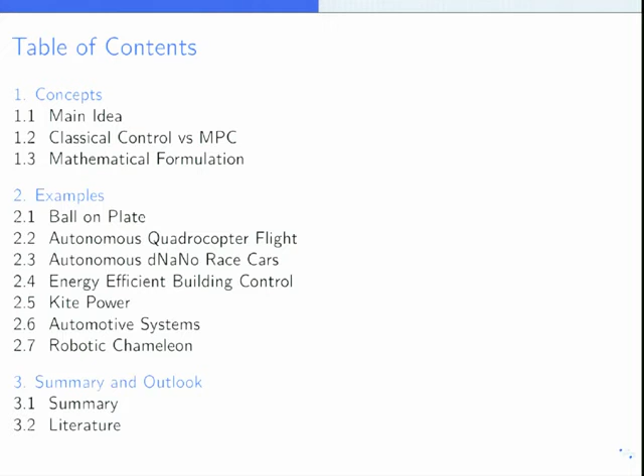So clearly, what are some of the objectives and constraints? Fastest lap time, clearly you don't want to crash, so you want to avoid the other cars. You don't want to fly off the road. Formula One race cars, contrary to rally cars, you don't want to slip, you want to stick to the road, don't want to slip with the back or anything like that. Your acceleration is big, but it's still limited, also because of traction. So you have a number of constraints.

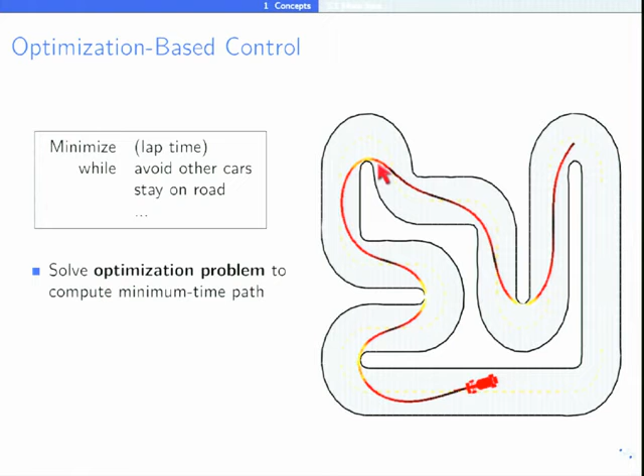Now the problem is, in the real race course, suddenly things change. There may be a car that moves in front of you, and so you cannot just follow this race course as it's indicated here, because if you follow your trajectory, you're going to hit that other car.

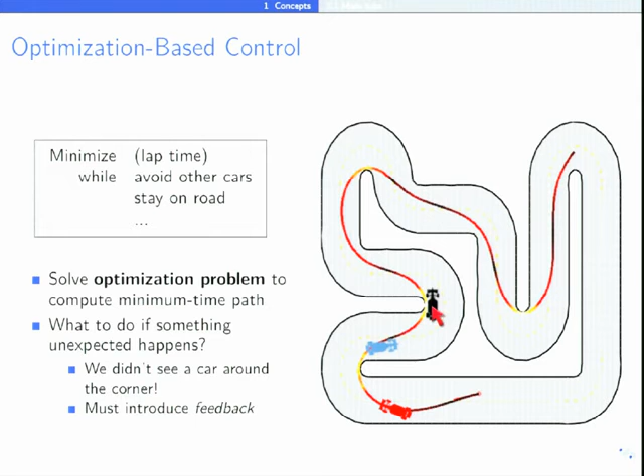So the way you have to correct your pre-computed trajectories, you have to introduce feedback. Feedback meaning information about what's really happening, and then use that information to modify your policy that you worked out ahead of time. And so this would be indicated here.

So we have now recomputed, as soon as this red car realized that the other car is on the road, the originally white trajectory has been recomputed. We see now again the new dark trajectory that takes into account the other cars. So based on the information the car received about what else is on the road, there's a recomputation of the trajectory that is now optimal given the new scenario with those other cars ahead of the red car.

And so, in principle, what you will do, you will only apply this strategy that you have figured out for the red car over some time or some distance. Then you will reassess the situation, apply the first control action, reassess the situation in front of the car, and repeat this planning procedure, starting with the new position of your car and knowledge about what the other cars are doing on the road.

So that's the principle that you would go through: repeatedly solving an online optimization problem and continuously updating your optimal trajectory going through the course.

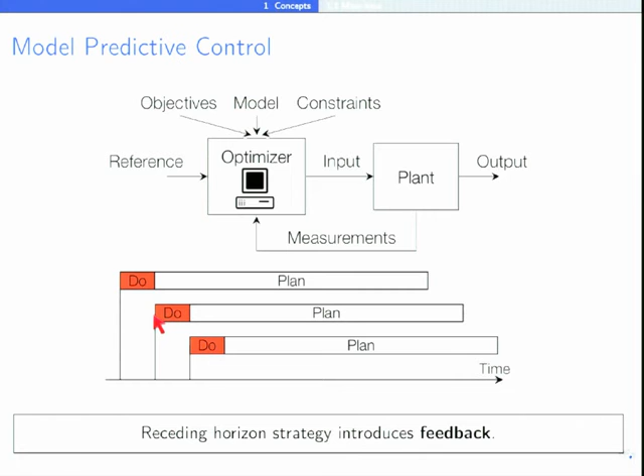That's all there is in terms of the basic concept of model predictive control, and you will see that you don't do it only for race cars, you can apply this strategy to many other very practical problems. But as I mentioned in the introduction, MPC is not a replacement of the traditional control loops that you learned about in the courses you had up to this point, but it's complementing it.

You have issues, so those are traditional control objectives, like we addressed them in Regelsysteme 1. You do that by loop shaping. You want the loop to compensate, not to be affected by noise. You want to correct for disturbance effect, etc. That's how you do traditional feedback design.

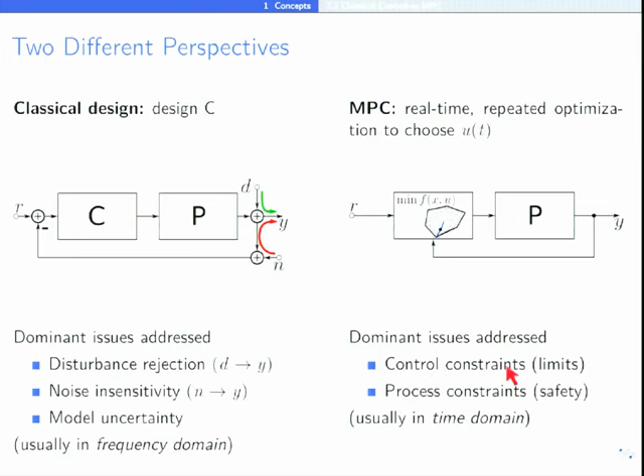Constraints - details why constraints are important, because every physical system is subject to constraints. And so there are different types of constraints. One is certainly actuators - your manipulated variables, your motors that drive some flap on an airplane, some valves that you can open and close. They're all subject to, for a motor, maximum voltage that you can apply; for a valve, completely open or completely closed. There are constraints.

In addition, there are constraints, for example, on the rate - how fast can I open the valve, how fast can I move some actuator. So there, from design, from the physical system, there are constraints imposed on the actuators.

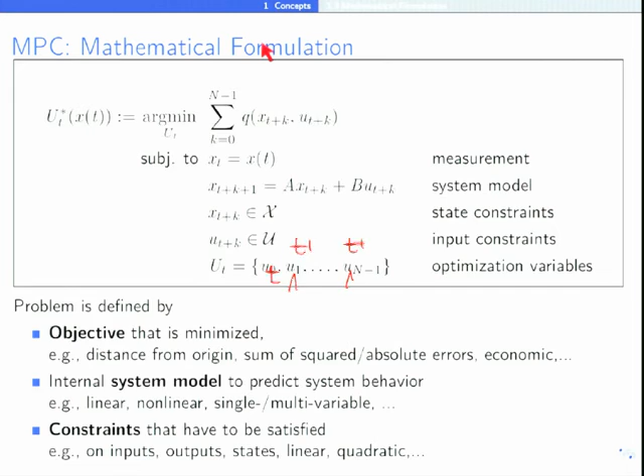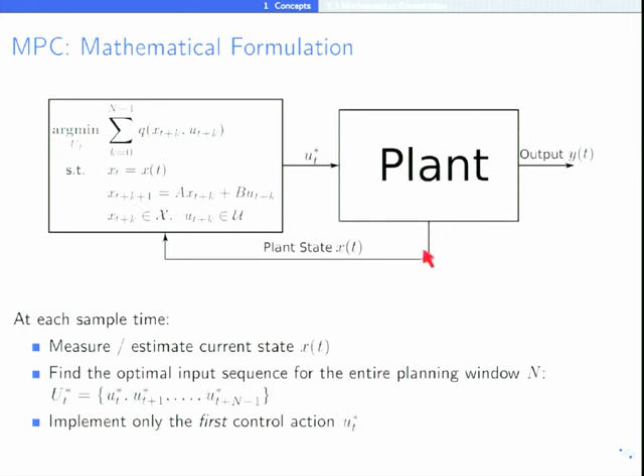Let's re-represent it here. So again, you have this optimization, you take a measurement, this is the plant state, you feed that as initial condition, you do the optimization, you get this trajectory of future control moves ut, you pick the first one, you implement, that's a little u, small lowercase u here, you apply to the plant, you take another measurement, etc. So that's the idea. Are there any questions to this concept?

Okay, if not, then I will just show you a number of applications, many of which we have been involved in one form or another. So let me give you an illustration. First, from very fast applications, so nanosecond range sampling times, to very slow applications, sampling times of weeks. Over that whole range of time scales, you can apply this model predictive control. Obviously, different complexity of the model, different form of the model, different optimization procedure, etc. But the concept is the same.

So what do we do in terms of computer control? Let's say you have a multi-core processor, and you want to schedule your processes, and or you want to decide on the frequency at which you run the individual processes, to perform some computation task. And what are your limits? Your limits are, for example, that you have temperature limits in parts of the chip that you don't want to exceed. You want to do that energy efficient, so there are a number of objectives.

And Colin Jones, who was a postdoc here, is now a professor at EPFL. He worked on this and actually tried it out on an 8-core processor chip together with colleagues at EPFL, applying the model predictive control concepts. So you look at the future, what are the tasks that you have to solve, what are the constraints, how should you schedule your processor frequency in order to meet the constraints, meet the workload, minimize energy.

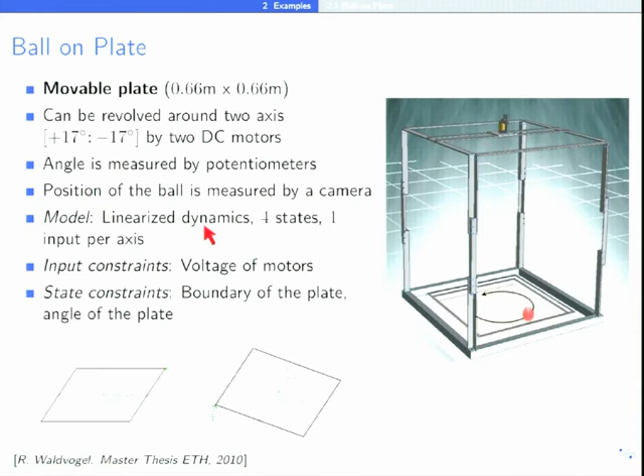There was one master thesis he has mentioned, and there were a number of semester project theses and so on that were done on the system.

And here you see a simple comparison of two controllers. On one hand, you have this linear quadratic regulator, which you heard about in other classes, which we also introduced on day 2. So this is a simple proportional controller. It doesn't know anything about constraints, so whenever it hits a constraint in terms of the actuator, it just stops. The controller doesn't know about it, it just acts as much as it can, and then it stops.

And so you see the result of what happens. There's a comparison between the red trajectory here and the blue trajectory. The traditional controller goes around in this direction. So what happens is the red system, the ball goes in this direction.

Then at this point, the controller realizes, oops, I have to make a corner. But by the time it realizes, the ball has already continued moving. So while it tries to lift the plate, the ball continues moving, and then finally the plate is tilted enough and the ball returns to that trajectory. The same happens here, this overshoot. You see exactly this happens in the red and blue curve, so it has this angle at some maximum or minimum position. Then it realizes finally I hit the constraint, and then it changes things, but it's actually too late.

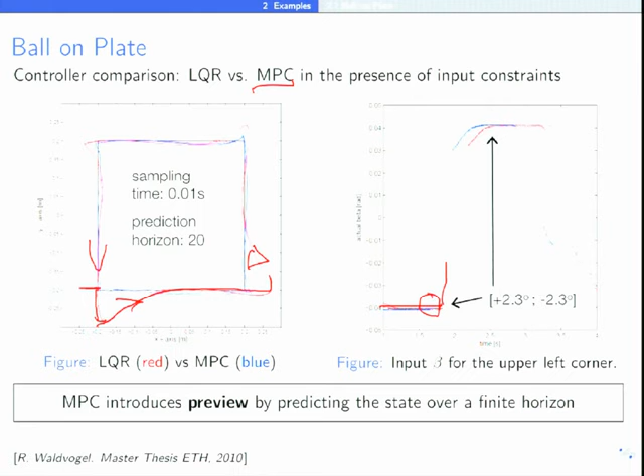That compares to the blue, which is the MPC, which actually knows from predictive control before you hit the corner. It has the predictive capability - before you hit the corner, it actually has to start tilting the plate so that it doesn't overshoot. So you see the blue one shifts before, changes, and therefore can follow this square pattern more accurately. So it has this preview capability that improves the performance.

And here, I have to make sure - now we didn't try this out, but let's see here. Okay, so this is some of the early movies, and you see exactly this following the trajectory.

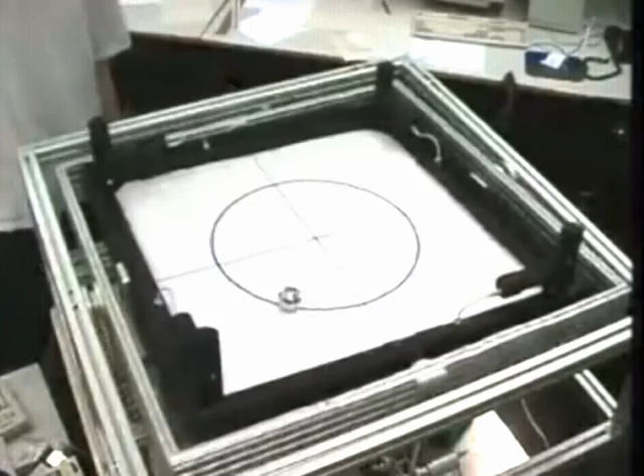Here also some circular trajectory. Obviously, that's again the replanning, etc. So even if you disturb it, it will return. You can also try it manually, and at this speed it's a little bit difficult to do manually.

Autonomous quadrocopter - those are the little quadrocopters that Professor Siegwart has, and we had some master thesis that we did together with people in his group. So you have those quadrocopters, which I'm sure you have seen and heard about, and you can change the pitch and the speed of rotation of those motors.

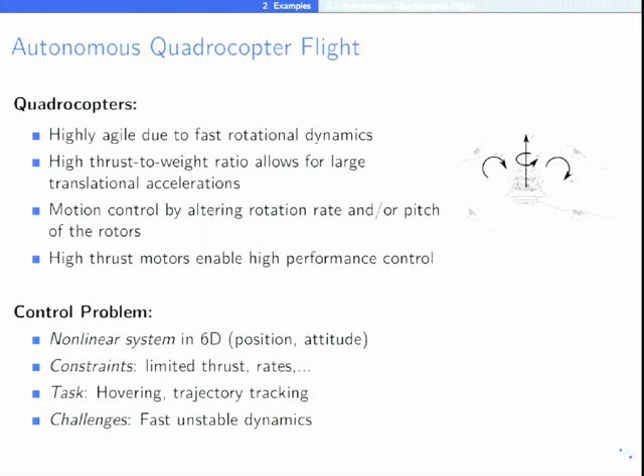And again, you want to follow some prescribed trajectory accurately. In this case, it was some application where they want, for example, monitoring or doing some repairs, so you should do it in proximity to some other structure. You don't want to overshoot and run with this helicopter and destroy the equipment while you are running through those trajectories.

And so here are some examples. Now you see a similar trajectory and a similar performance to what we saw with the ball in 2 dimensions here. Again you have this 3D movement, and again you want to track this square, and you see with a simple LQR controller you get those overshoots just in the same way. You can see it a little bit when you look at the movie.

This is a lot more unstable and moving compared to the next one, which is the MPC.

Okay, now we go to the MPC. You see a much smoother movement that then also goes into that more accurate tracking that I showed you here at the bottom.

This is, I think for illustration, it's actually not done here. Raffaello D'Andrea was probably similar, so I'll skip that. This is just another helicopter parade. Maybe I shouldn't skip it—it's just to show that we are not only focused on ETH and Berkeley. There are other people doing good things as well. Few, but there are some.

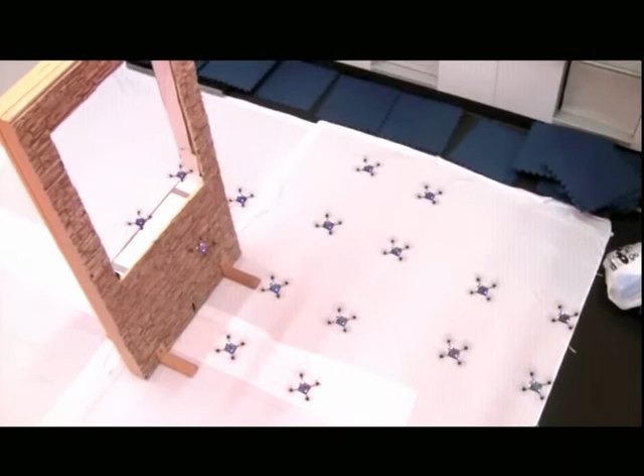Okay, I'll skip the rest. You can also watch it on the website of the University of Pennsylvania, Professor Vijay Kumar. Let's go back here.

That is now an ETH project, our little race cars. Those are cars that we got from a Japanese company, at some standard model race car scale. They're very fast—if you really scale it up, it would correspond to cars going like 400 kilometers an hour, all scaled up. Radio controlled, you can actually use control up to 40 cars on that racetrack.

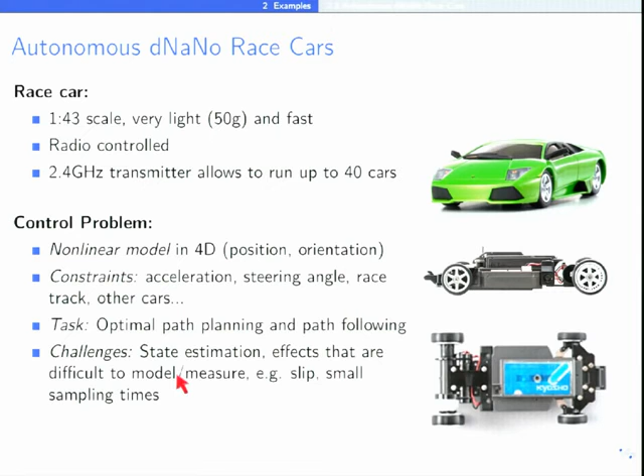We have some models of those cars: position and orientation, as well as velocity and angular velocity. Constraints, obviously, on acceleration, steering angle, racetrack boundaries, etc. And again, as I mentioned in the introduction, you want to do optimal path planning and path following. There are a lot of challenges in the sense of what you cannot model very accurately—for example, slip of the car going around the corner.

I will show you some of our racing. I must say that some of it has been sped up, so it's not totally real time. Positioned through an infrared camera and reflectors on the car. All of it has been built by students—not graduate students, but undergraduate students doing their master's and semester projects on various parts, from the visual tracking system, to building this infrared tracking system, to doing the control, etc. And so that's a continuing project in our group.

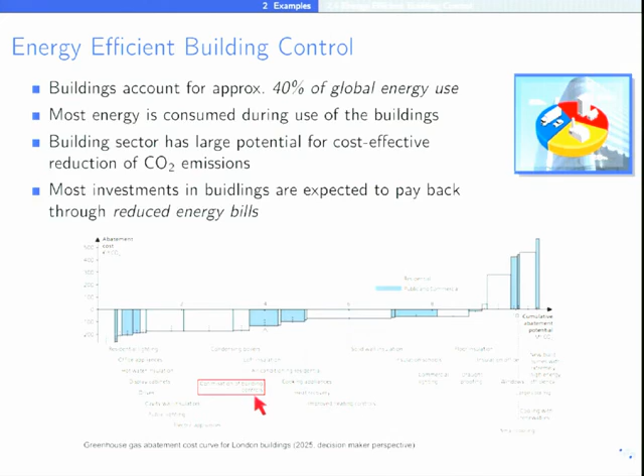What comes here is optimization of building controls. You can invest in building controls, and it will save you more money and CO2 with relatively small changes. So this is what we focused on. Here is one idea.

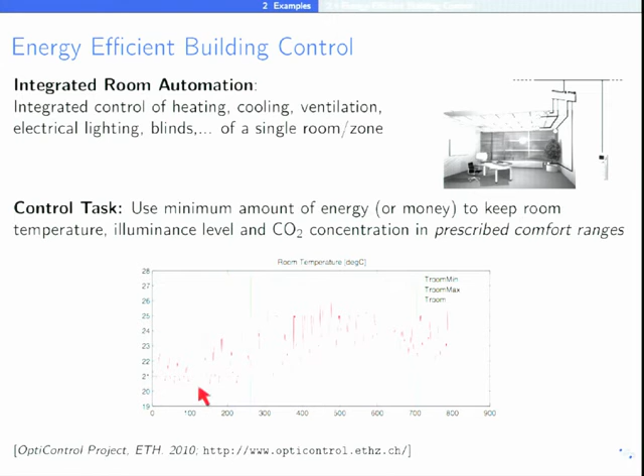I can't tell you offhand, but I think this was a simulation where the temperature varied in the room, utilizing fully the freedom offered by the lack of temperature constraints. For example, on a summer weekend, you exceeded the temperatures far in the room, but it wasn't necessary to do anything because nobody was in the building. Here you drop below the required temperature on the weekend, allowing you to save energy.

So how do you do that? At least how we did it, and how one can do it: you have a model of the building, and you get predictions about the effects on the building.

For example, weather forecast - we got weather data directly from Meteo Suisse, transferred hourly. We'd get local weather predictions, as close to the building as we were, over the next 72 or so hours, updated hourly, including not only temperature but also solar radiation and other data.

Also information about occupancy - is there somebody there or not, how many people, etc. You can account for electricity price predictions. For example, running your air conditioner at night is cheaper than during the day, so you may subcool during the night so you don't have to do so much cooling during the day. You shift the loads, electricity network loads - all of that you can account for in this MPC optimization problem.

This is some typical results, and those are again simulations, but we have actually done some implementation on an office building in Basel, an office building of the bio company Actelion. That was in the news because they had a new drug test successful, and those ideas have been implemented and running for a couple of years.

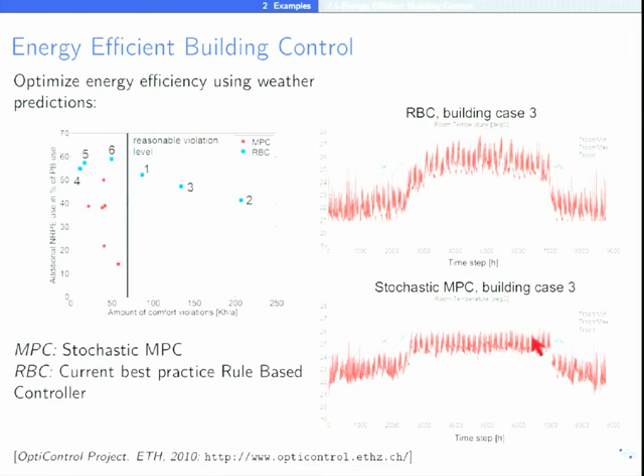So here that would be rule-based control, the standard state-of-the-art Siemens rule controller. This is the whole year period, 8,760 hours, and here you see the fluctuation - the upper bound in green, the lower bound in blue, like I showed before. With rule-based control, you're running very much at the top of the allowed range. With stochastic MPC, which we'll talk about on the last day, you can operate much better in the range, so you have increased comfort, and it turns out you have decreased energy use as well.

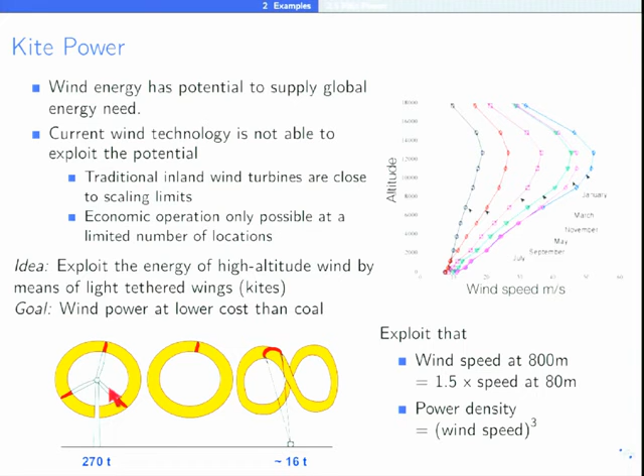That's the basic concept that was suggested some decades ago, but they could never implement it. Now there are research programs to do that, and we have a program as well.

One question is whether you should do the energy generation by flying the kite in a figure-8 pattern, pulling out the line, and through that pulling, turning a wheel and generating electricity. So you generate by pulling out, then you change the angle of attack of the kite, and pull it back in with almost no force. The wind pulls the kite out, you generate electricity, then you pull the kite back in with a changed angle of attack, requiring very little force. So you have this periodic movement: letting it go out, pulling, generating electricity, pulling it back in.

That's the basic idea, and here I can show you some video of autonomous kite operation. We have this kite, in collaboration with EMPA. The idea of automatic control is to do all that automatically - to start the kite, direct it in the figure-8 pattern, and draw it back in. I'm not going to go through the whole length of the movie here.

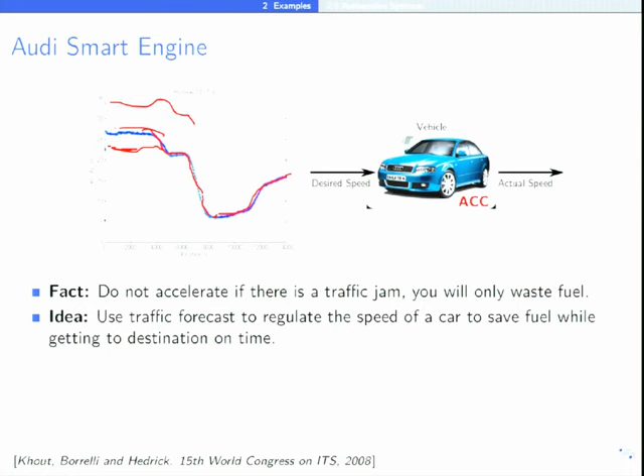Okay, so this was tested. You could see that you get there at the same time, with the right trade-off between fuel efficiency and time.

The next presentation is about something we've been working on a lot: self-driving vehicles in slippery conditions. You will see this video on Wednesday. The idea is that it's extremely difficult to design a controller that allows you to go through obstacles on a slippery road if you don't have a forecast of the road and its conditions—where the obstacles are and where the friction becomes lower than your current friction.

Okay, and again, I'm going slow—otherwise I'm going fast. Show the movie. You want to show the movie? Okay, I'll show you that.

So this was one of several tests. Usually automotive companies test this type of control in the north part of the world. When I was in Europe, this test here was in North Michigan. There are facilities in Sweden where car manufacturers bring their cars to test different types of controllers, including this one.

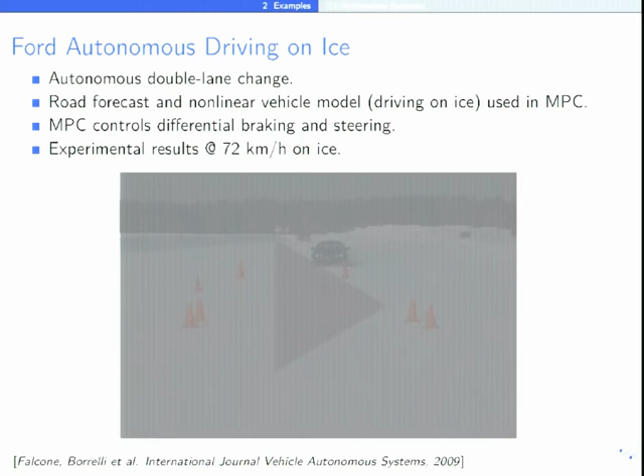Next, here and here—this is our most recent project with Volvo.

The challenge here is not the slippery condition, the challenge is actually that the human is falling asleep. So the concept is that if you have cameras inside the vehicle, you can forecast, looking at your body movement, what's happening inside the car, and using that forecast you can avoid exiting a lane. This type of control is called lane keeping.

The idea is that it's not a self-driving car, it just looks at you, looks at your hands, and then lets the car go. If it forecasts that you're going to go outside the lane, it takes over and brings you inside the lane. So it's a minimally invasive concept, which is different than a self-driving vehicle.

I'll tell you more again on Wednesday about this fun application in the automotive world.

This was a graduate student that was trusting the MPC a lot. I wouldn't drive in that car yet. So,

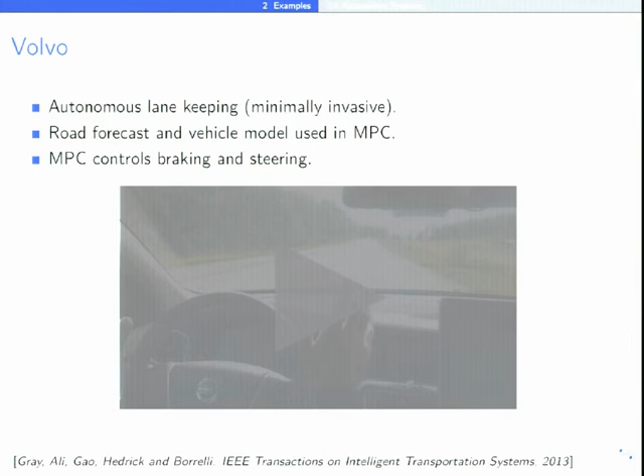Yes, okay. This is old, this goes back to 2008, five years ago. The reason why it's in here is because this is probably one of the most complex designs I've ever done.

It's about tracking a simple point, and it has to be fast. You want to keep the point inside a given target area. There are two eyes trying to look at the point, like in a chameleon. The second concept is that it uses MPC in the form you've heard from Professor Morari, if you see the target. So this would be a tracking problem.

If the target goes outside the square, so you don't see it, you use an open loop. You design a controller to simulate a saccade, still in the MPC framework, but without updating the state. You forecast where you think the point is going to be, and go in open loop to that forecasted point. You do this saccade, check if the point you're trying to track is in there. If it is, you continue with smooth tracking; if not, you search again in the space. This is typical in this type of animal, they switch.

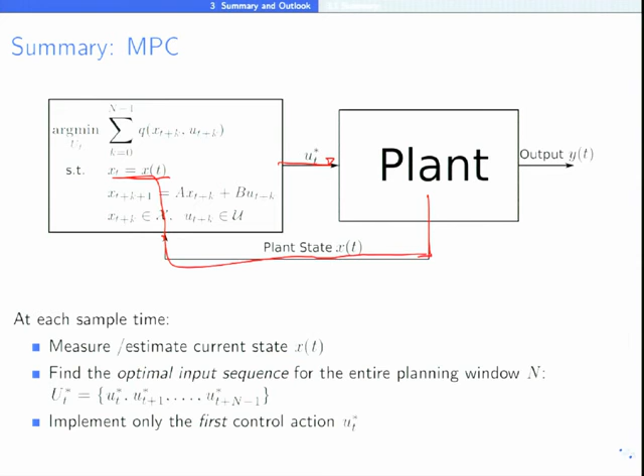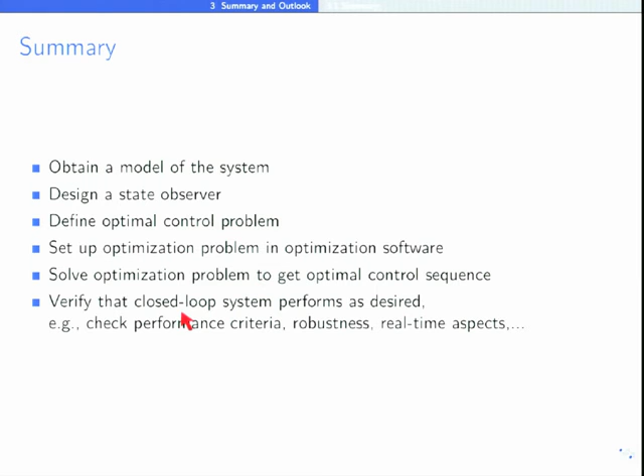So, summary: what you need to do that. You need a model, that's the key thing. The whole approach is based on a model, and the quality and improvements you get depend on the accuracy and fidelity of your model. Usually you cannot measure all the states, so you need an observer or filter to get the states. Then you define the optimal control problem, meaning the objective function and constraints. You set up the optimization problem in whatever software is available, and solve it in real time with the proper speed needed for that application. Finally, you have to do testing to verify the whole thing works.

So what are the main advantages? As I said, systematic handling of constraints, and with a good model, very high quality performance. What are the challenges we'll address? Number one, implementation: you have optimization code that has to run in real time reliably, meaning it has to come back after your sampling time with a solution that, if not optimal, is at least good enough not to mess up the whole system. You need to absolutely trust that it's not a case of no solution found, try again.

Okay, that is not acceptable in this environment. Stability, we haven't talked about it at all. Clearly, we want this feedback loop. We want to guarantee stability with a controller that's not a PI controller, but an optimization routine, such that stability is guaranteed. Robustness, when there's model uncertainty. Feasibility, we want to make sure we can satisfy the constraints, not only at present, but also as we move on in time and in space with the system.

Outlook, part 2, coming now, focusing on what optimization problem we get, how we solve it, how we set it up. That will continue on Monday with detailed numerical methods. Part 3, also later today, is how to look at feasibility and stability, and then advanced topics later next week on Tuesday and Friday that deal with soft constraints and implementation issues.

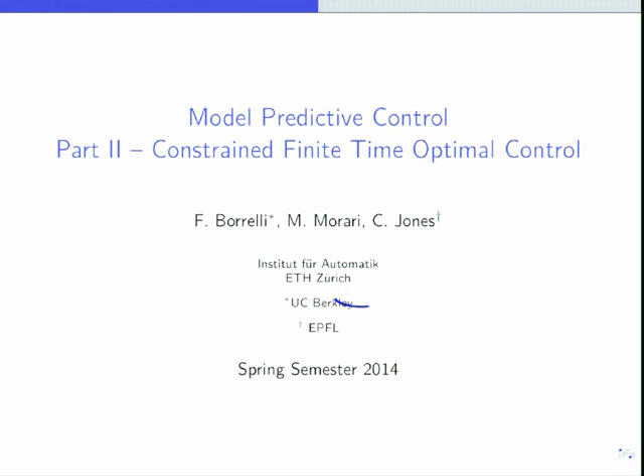Okay, I'll get back to Professor Borrelli here to start with part 2. Do you have your part 2 now? Okay. Berkeley, okay. There's an E missing.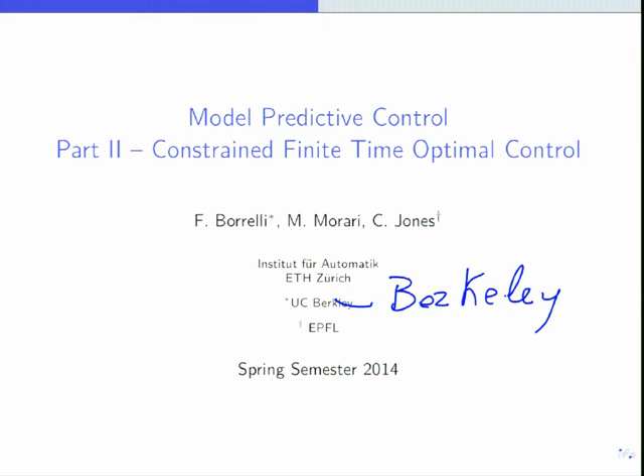Part 2 is about the solution of finite time constrained optimal control. In these slides, you will not see the word MPC. In the first part, you heard that MPC is about the repeated solution of finite time constrained optimal control problems. These slides tell you how to solve finite time optimal control problems. Let's go directly to the main points: the formulation and the issues.

We have, as you've seen in the first lecture, a cost function with a terminal cost and a stage cost. We call them P and Q. We optimize over a sequence of inputs, U0 through UN minus 1. In terms of norms, we'll focus on two types: a squared Euclidean norm, which is the standard one you've seen in LQR, X transpose P XN for terminal cost, X transpose Q X, U transpose R U for stage cost.

We'll also very briefly touch on 1 and infinity norms. So as a cost, rather than using a squared Euclidean norm, you could use the infinity norm of a weighted sum of the states and inputs, as well as an infinity norm or a 1 norm of a weighted sum of the states. The constrained finite time optimal control problem, you will see this acronym often, CFTOC.

Constrained Finite Time Optimal Control Problem tries to minimize the cost J, subject to linear system dynamics, state and input constraints, and terminal constraint. The assumption is that calligraphic X, calligraphic U, and calligraphic XF are polyhedrons. So X belongs to a polyhedron described by a set of linear inequalities.

This is the problem we would like to solve, and the question is, how do we solve this problem? First, before telling you how to solve this, for the different cases of a squared Euclidean norm or 1/infinity norm, I'm going to define what the feasible set is. What is the difference with LQR? Anybody?

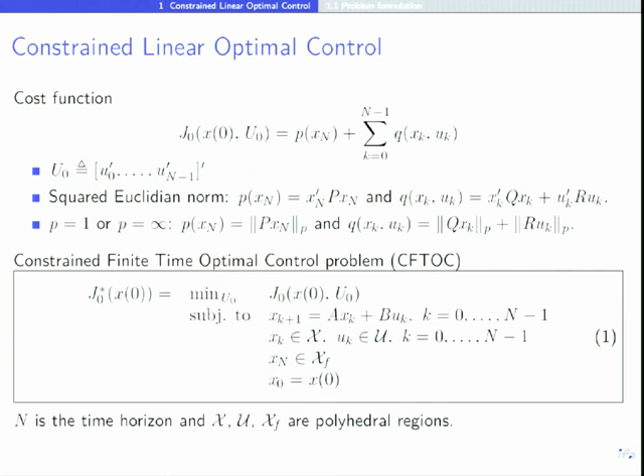If I give this without constraints, this is your LQR, linear quadratic regulator, if I use a squared Euclidean norm. Everybody knows finite time LQR, you know the solution to this problem. Now you have constraints, okay? Constraints imply that in general a solution might not exist. So we define a feasible set, calligraphic X0, the set of all points x0, all initial states.

All initial states x0 such that there exists a feasible input sequence, which when applied to the system dynamics generates states which are feasible. In general, we define calligraphic Xi as the set of feasible states at step i.

Let's try to sketch this, I'll spend 5 minutes on this, it's an important concept. If you want to sketch this, we'll have a terminal set which we call XF, at time N. At time 0, we have our constraints, which we call calligraphic X. The question here is, we want to compute the set of points which start in X and can be steered into XF in N steps: step 1, step 2, step 3, up to step N. So calligraphic X0 is a set, it's a subset of X. We will use this here.

Let's go back to the slides here. Okay, now we know where the controller is defined, in these sets. How do I compute the controller? Well, simplest case: no state and input constraints.

And square the Euclidean norm. By the way, in the slides, square Euclidean norm, quadratic cost, two norm are all the same, and they mean X transpose QX plus U transpose RU. The no constraints case means that the set of states and inputs is R^(n+m). In our notation, n is the number of states and m is the number of inputs. There is no terminal constraint, so the problem is unconstrained.

You remember from lecture number 2, your controller is a time-varying state feedback linear controller. That's the solution, and you know how to compute the gains Fk, as you've seen in lecture 1. If you let n, which was for a finite time optimization, go to infinity, then you have an infinite time controller, which is a time-invariant linear controller, and the feedback gain F infinity is computed through the equation that you have on the slides.

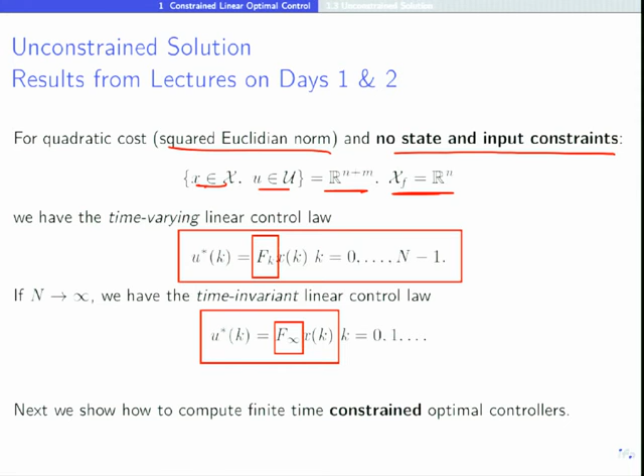Question is, now I have constraints. Let's remove the assumption that the problem is unconstrained. So what is the solution? How do I compute it? Well, you have slides for both cases, 2-norm and infinity norm. I'll spend some time on the 2-norm, and go very quick on the infinity norm. 2-norm.

This is again repeating the problem just to make sure we specify exactly what you are trying to solve. The cost function is the sum of a stage cost and a terminal cost, X transpose P xn, and the stage costs. They are square Euclidean norms, and P and Q are semi-definite, R assumed to be positive definite. Standard assumption in the LQR problem. We have a linear system.

We have state and input constraints. At each time step, I want the state to be in X, the input has to be in U, and the terminal point has to be in the set XF. The way to solve this is to use a 3-step procedure and transform the problem into a quadratic program. Here this slide tells you the 3 steps.

First step is to rewrite the cost, focusing on the cost. You rewrite it as a quadratic function of the input sequence U0 and the initial state X0. So you see this is now a quadratic expression in the vector U0, X0. All these transposes mean this is a row vector, this is a column vector.

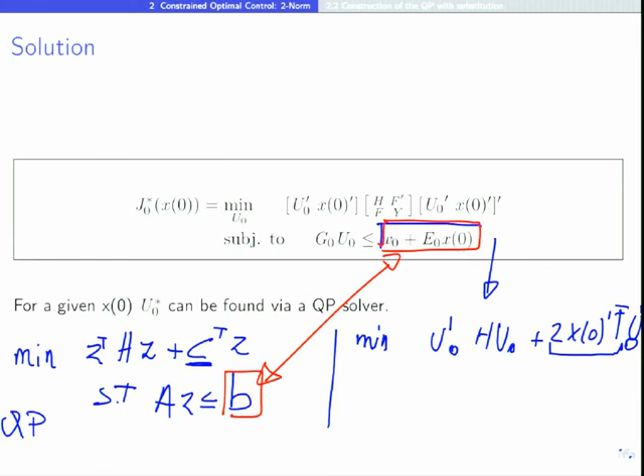Questions? Let's go next. So, in summary, you know how to solve a finite time constraint optimal control problem for square Euclidean norms and linear systems. Well, there were these steps. If you go back to the 3 steps, step 1 you have done in lectures 1 and 2.

Step 2, I went really fast. I said you transform all your constraints into a set of linear inequality constraints. That's all what I've said. In the slides, there are details on how to do this, and I'm not going to spend time on it. What is the basic idea?

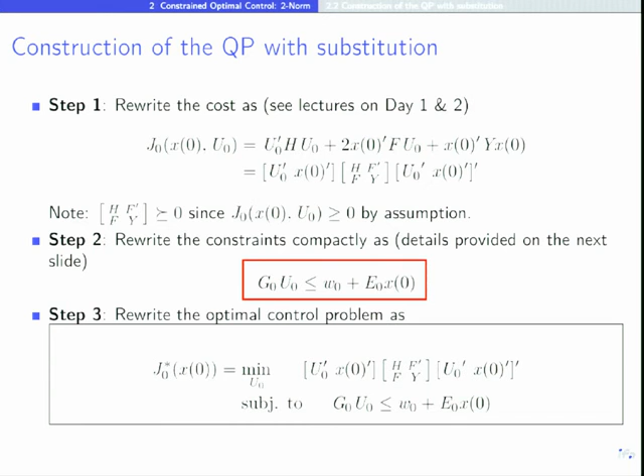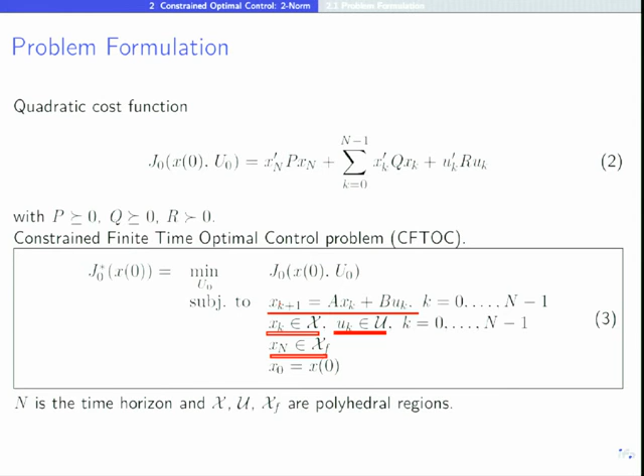Well, before, remember the problem you want to solve? It looks like this. It is a polyhedral. The system is linear. Constraints are x is in X, u is in U, and xn is in Xf. So these, x, u, and Xf, are polyhedrons. It means they're described by linear inequalities. Linear inequalities, linear systems, give you a set of linear inequalities. That's the idea. It's about matrix multiplications.

Let's do just one case. There are two approaches: one with substitution, another one without substitution. Rewrite the set of state constraints x as a set of linear inequalities, the set of input constraints as a set of linear inequalities on u, and this is your terminal constraint.

You want to write all these constraints for 0 to n. And so here is your G, E, and W that form your matrix, that form your set of linear inequalities. For instance, here you can see where these are coming from.

Here, what is the first row? First row is AU U0 less or equal to bU. This is the first constraint on U0. This guy here is a constraint on U1. What about this row here?

This is all zeros, minus AX, bX. If you go back, E0 and W are on the same side. So this row here is the state constraint on x0. This is AX x0 less or equal to bX. What about this one here?

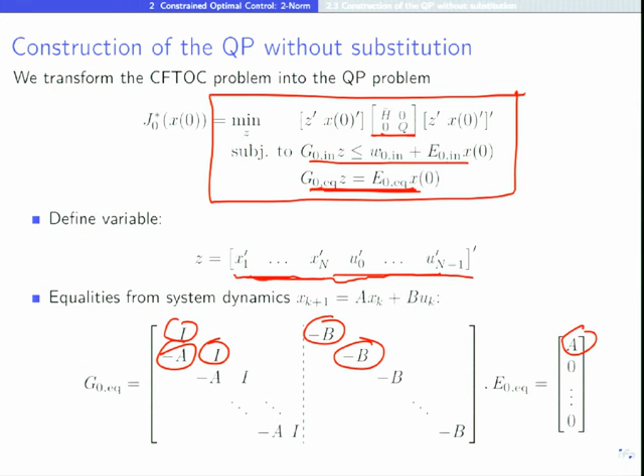What happens now? You have a much larger set of constraints, because now you see this big matrix of inequality constraints. You have all constraints explicitly written, but now your matrix is sparse, it's block diagonal. So you will hear on Monday that this class of problems, if you use a QP, is actually easier to solve than having a dense but small matrix. Sometimes it's better to solve a quadratic problem with a large and sparse matrix of constraints.

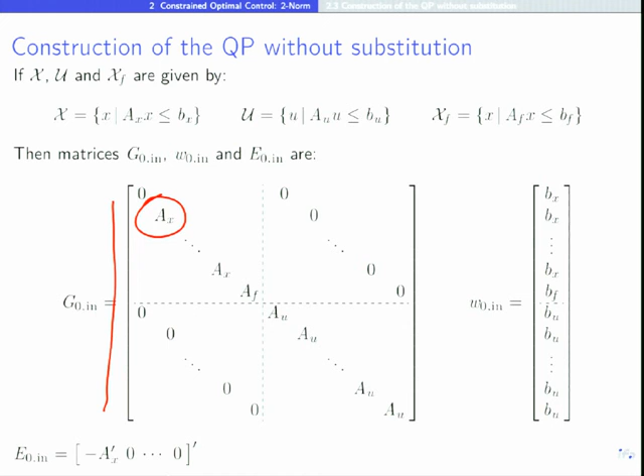So time is over here. Very quickly, what is coming next?

We will skip it. In your slides, there is a star on the two-norm state feedback solution. It means we'll skip it in this lecture. This will be part of the advanced material, you don't have to study for now, and probably not even for the exam. Professor Morari will let you know. So the star means skip it, okay.

And the next is actually the 1 and infinity norm. I said I will not spend time, but everything that I showed you for QP, for squared Euclidean norm, holds for 1 infinity norm. There is a feasible set, x0, x1, up to xn. What is the main difference?

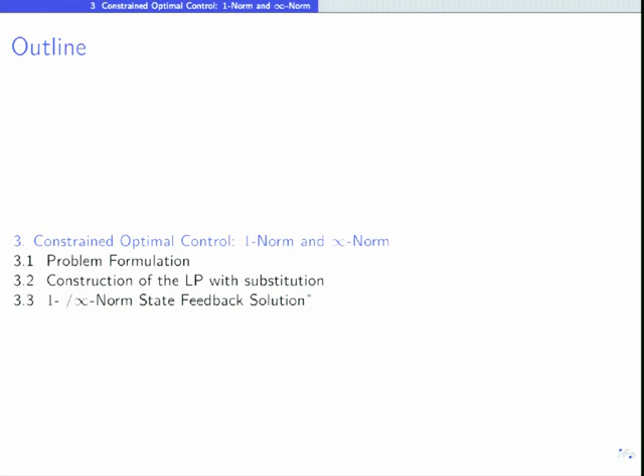When you do the conversion, the 3 steps, construction of the LP, you end up with a linear program, not a quadratic program. This is the main message you should remember, and I think this is enough for now.

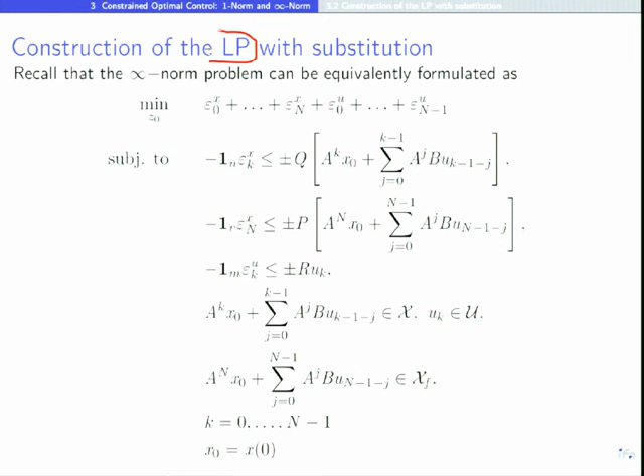If we have time, we'll go back to 1 infinity norm, but at this point the message for the last part of part 2 is that if you use, instead of a squared Euclidean norm, a different norm like the 1 and infinity norm, rather than solving a quadratic program, you need to solve a linear program for a given x0. Again, because 1 and infinity norm have piecewise linear costs, and Paul has shown you that piecewise linear costs can be transformed into linear programs.

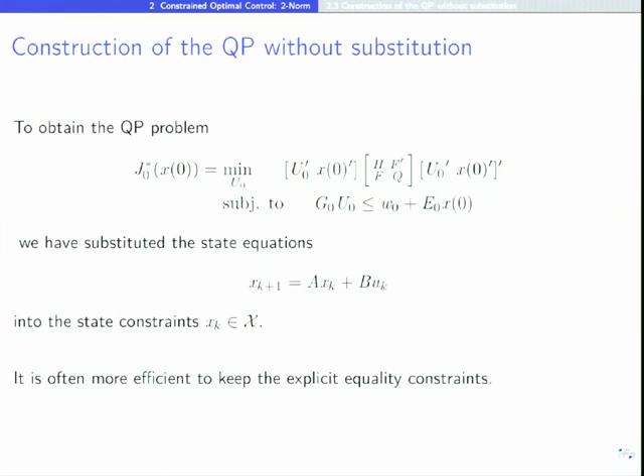But already, if you think about the way we have transformed the problem, I ask you: does this problem always have a solution for every x0? What is the answer?

I change x0, the initial state. I can measure the state and solve this problem, right? Change x0, solve this problem. Can it be infeasible? Yes or no?

Yes, it can be infeasible. It's a constrained problem. It means that for some states, you are too far from your xf. Your inputs are constrained. You are not able to reach xf in n steps.

So for some x0, this problem would be infeasible. For which set of states will this problem be feasible? Well, by our definition, in calligraphic x0, this problem will be feasible. So this is, if you had to sketch calligraphic x0 again...

This should be a polyhedron. Sorry, let's try again.

Make it simpler. This is calligraphic x0. I'm assuming there are two states, that's why I always do this plot in 2 dimensions. If I start from here, the QP will be feasible. If I start outside, the QP will be infeasible.

So, 2 main messages: remember the definition of the set calligraphic x0, and remember that to solve a constrained finite time optimal control problem, you need a quadratic programming solver.

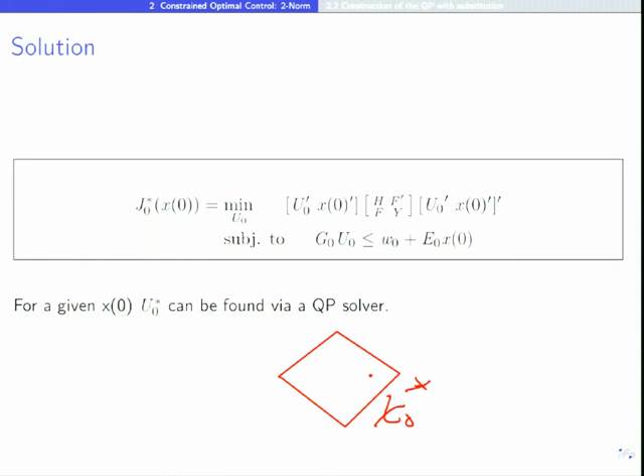Let's go to part 3, and probably I will not be able to cover all of part 3 today. Where is part 3? I think it's this guy here. No, I don't know how to go back to the beginning. Here, okay.

So the message here is to do more math, present the model predictive control concept in a more formal way, and address the issues of feasibility and stability.

Some of the first slides are just repetitions. Basic idea: you know Professor Morari spent a lot of time describing the main concept. You would like to solve an infinite horizon problem, where you have system dynamics, state and input constraints, and you minimize a cost.

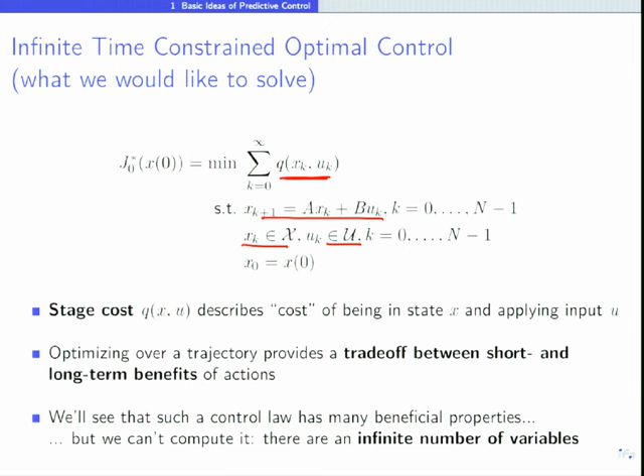And you'd like to solve it very long, so you take into account and make sure nothing will happen in the future, because you have accounted for all possible events that can happen. However, this is very difficult because this problem has an infinite number of variables, so sometimes what we can solve is a finite time optimal control problem in a repeated fashion.

It's solved with the same idea that Professor Morari showed you: start at time t with a measured state of the system, solve this finite time optimal control problem, get an input sequence, apply the first one, and keep optimizing the next step over a shifted horizon. Two messages are very important for this part of the course, for these slides especially.

There are 2 elements that we introduce, already introduced in the constrained finite time optimal control problem: the terminal cost and the terminal set. Now you understand there is a simple interpretation here, because the idea of these 2 elements in an MPC framework is to try to capture what goes from n to infinity.

We would like to solve the infinite time problem, but we cannot, because we can solve it only in the unconstrained linear quadratic case. So if we want to solve a finite time problem, we would like to add a cost so that it captures the cost from n to infinity, and we would like to add a constraint so that it captures the constraints from n to infinity.

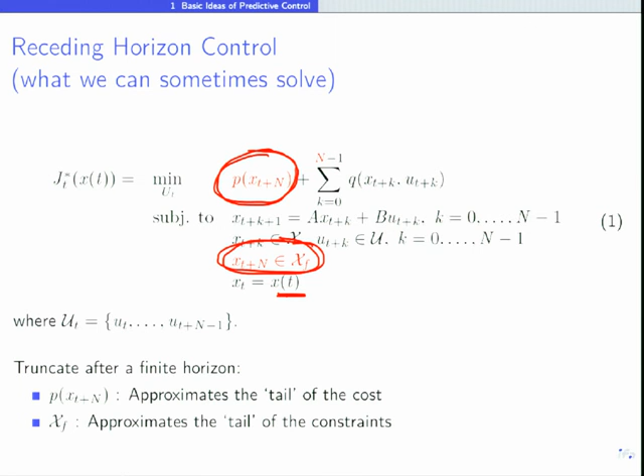So, repeating the same slides. Once we know how to solve a constrained finite time optimal control problem, especially for linear systems and polyhedral constraints, this algorithm—a receding horizon control algorithm, a moving horizon control algorithm, a model predictive control algorithm—is very simple. Measure the state, solve the finite time problem.

You get an input sequence, the one you see in red. Apply only the first one, trash the rest. At the next time step, solve another finite time optimal control problem over a shifted horizon based on a new measurement of the state. That's the most important thing: at t+1, you don't start from what you predicted where the system would be, but you start from x of t+1, which is your measurement of the state at time t+1. And this gives you feedback.

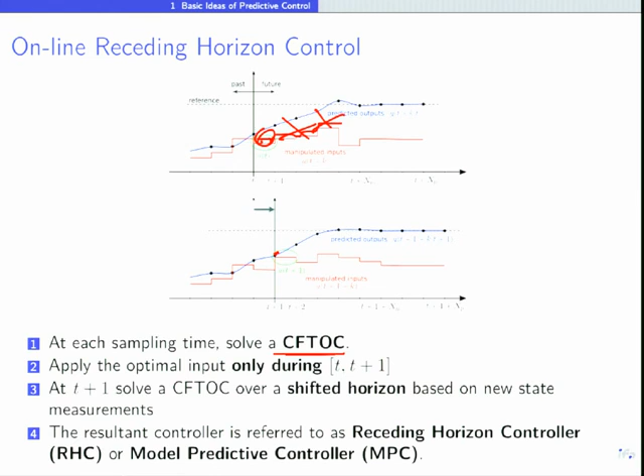So the algorithm is really five lines. If you have to write an MPC algorithm, it's very, very simple: measure the state, solve the QP.

Do this all the time. If you play chess, you do this all the time.

A little bit of history—I'll go very quick, you can ask Professor Morari, he knows it well. This idea goes back to the 60s.

Propoi wrote a nice paper you can download, actually very simple to read, whereas for linear systems and linear cost you can design a controller using a linear program. Very visionary at that time, in '63. Only much later did people start using these concepts.

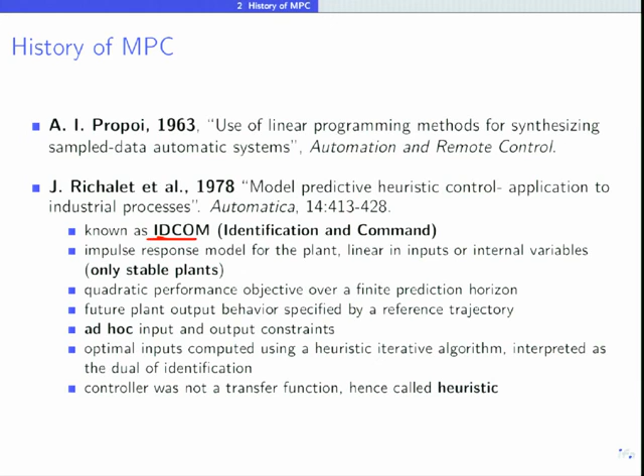In the 70s you have the first algorithm, IDCOM, in '78. Then in '79, dynamic matrix control was quite popular and used in the chemical industry—sometimes they had strange names like heuristic controllers. The idea at that time was that a controller was a transfer function; something that was an optimization algorithm with lots of iteration steps was considered a heuristic. That was not well understood at that time.

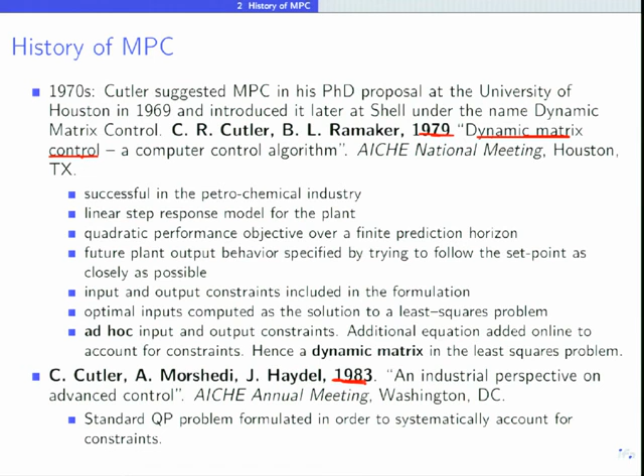Only later, in '83, people connected the operations research world—the QP, the quadratic programs, the linear programs—to the control world. What's happening today? We had 20 years of studies with just lots of theory on why and when it works. This is around 2000, the period of my research, where we looked at MPC for hybrid systems, fast MPC, and I'll tell you more later about stochastic MPC and MPC for large-scale systems.

Let's go to the notation. Before presenting the pros and cons, and why there is a theory of MPC, the first thing is that when you open a paper, notation can be quite ugly. So the idea here is to present the main concepts so you can read papers on MPC, while also understanding why we are using a simplified notation.

This is the right way of writing a predictive control problem. You have a linear system—again we are using linear system models, but everything I'm going to say is also true for nonlinear systems, most of what I'm saying.

The parenthesis x of t+1 denotes the evolution of the actual system—x of t+1 is the state of the system at t+1. This is the input that I apply at time t, different from the model used in the MPC. That's done on purpose—that's why there is this notation that might look strange, which says that the state used to initialize the model in the MPC is equal to the measured state at time t.

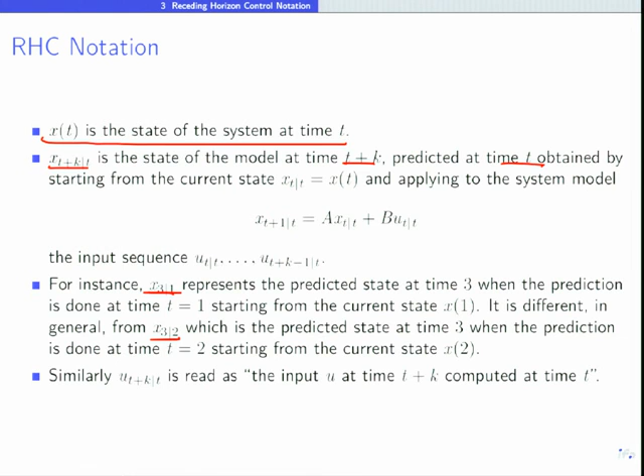So x3 given 1 is different from x3 given 2, even if the time is the same, because the prediction is made at 2 different time steps. That's why you need this notation. This is xt plus 1 given t will be a function of... xt plus k plus 1 given t is a function of xt plus k given t. Questions?

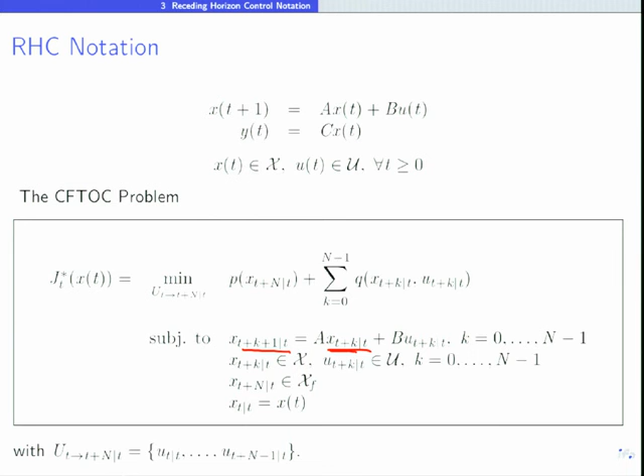So this is the most general form, and problems should be written in this way. I'll show you in a second that we'll make it simpler, otherwise it will be a messy slide with all this ugly notation.

Before doing that, what is the control action? Remember what MPC does: you measure x of t, you get the input sequence u star of t given t, and then you take only the first element, which is u star of t given t. This function f, which takes x of t and gives u star of t given t, is actually f of t, the MPC controller.

It's a complicated function. It's an implicit function. Why? Because you don't have an expression. There is an algorithm, a solver, a QP solver that runs and gives you the output. There is no analytic expression for this function.

The closed loop system, if I have a linear system, will be xt plus 1 equal to A x of t plus B, and then the controller, which is f of t, x of t.

The notation we're going to use is simpler, and it's the one here, and from now on should be consistently this. If you notice that it's not, let us know there is a typo in the slide. Notation is much simpler than what you've seen before. What I've done here is to get rid of the given t, and let's set t equal to 0.

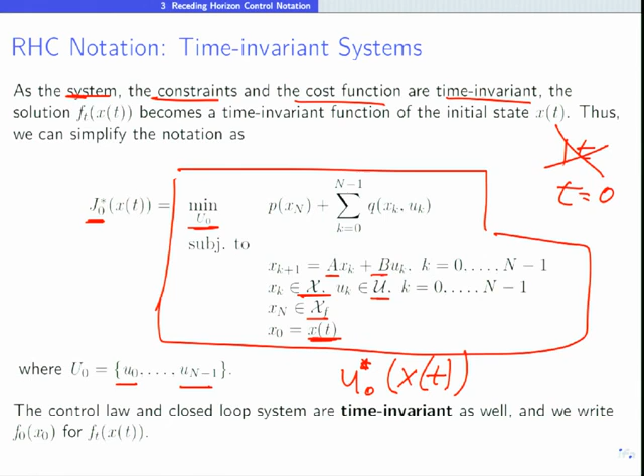With this notation, then we can go and look a little bit at the MPC, do some examples, and show you the pros and cons. Professor Morari already discussed this a few times.

All that we've said applies to linear and nonlinear models. It does. I've mentioned one input, one output—your regular system was assumed to have one u and one y. So this works regardless of the number of inputs and outputs. Time delays, you can put it in there. Constraints, put it in there. Any objective function—minimum time, even if the examples you're seeing are regulating to 0, you can use a minimum time objective function, linear functions, or nonlinear functions.

This is why there is a book and why there are lectures about MPC. The cons are actually what you have to focus on, okay?

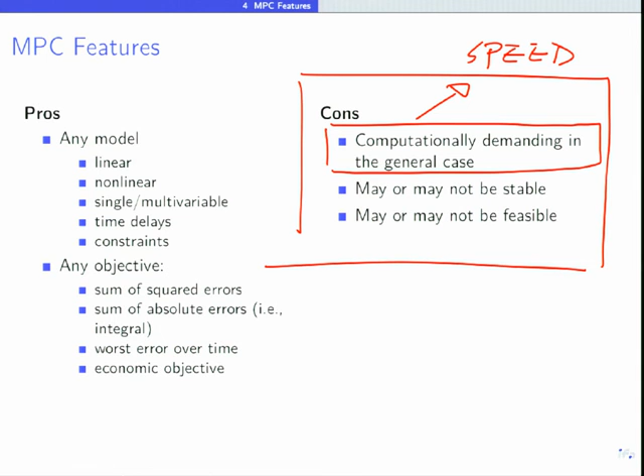Two main challenges. The first one, speed, okay? It takes a lot for the solver to converge. You cannot upload the solver on your embedded platform. Lots of research, lots of interesting work. On Monday, you will actually see Domahidi give you a lecture on how to make solvers which are fast and tailored to MPC.

Monday, okay? Today, we'll look at this. Today, and hopefully, I'm not sure we'll be able to complete today. There are issues that are called stability and feasibility issues. There is a challenge with these constraints. You start, and you're given a state. You measure a state. The problem, the solver doesn't find a solution. What do you do? You stop the plane, and you stop the helicopter up there. So it's a big issue to have an infeasible problem. That's what we're going to discuss today, trying to address stability and feasibility issues.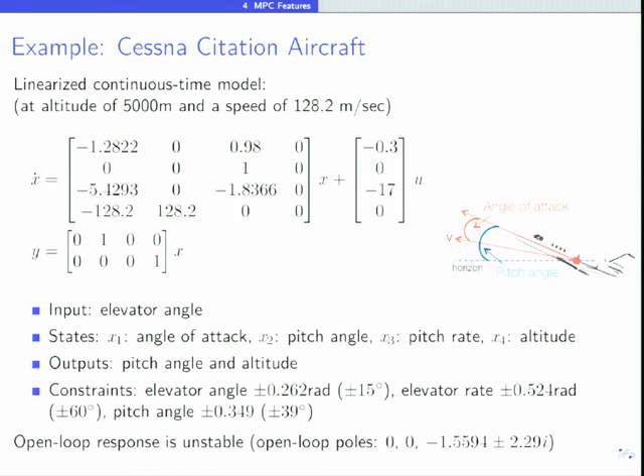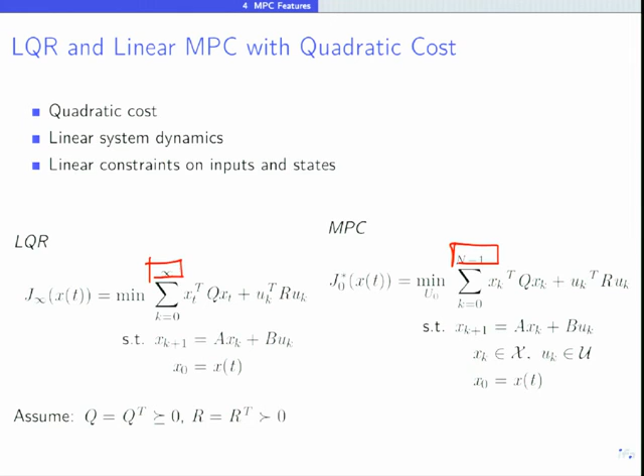These are my pitch rate, pitch angle constraint, pitch rate constraint, and what was the other constraint was on the elevator angle constraint. The second difference: infinity and N-1. This is short-sighted. This will be an infinite horizon controller. So few simulations, very simple tuning, not spending much time tuning.

The LQR is unstable. Okay, you start from an altitude. So the objective here, you start from a deviation of 10 meters from the altitude. So the blue will be 10 here. This is 10, and you would like to control it to 0, but what happens is that the plant is unstable. The way he has designed the controller is to say, this is my LQR, and then I apply, you see the input here?

The input here is actually saturated, and there are also rate constraints. So it's taking the output of the LQR controller, saturating it, chopping it, and applying rate constraints. That's only a very simple way of enforcing input constraints.

It does the same. So again, what you could do now is spend hours trying to tune this. That's one approach, and it would work only for the 10 meters, the simulation you are trying to do. The second is to say, okay, let's use MPC, and you can see, well, at the beginning, it only has input constraints. The elevator angle, and it's not unstable, but it's a limit cycle here.

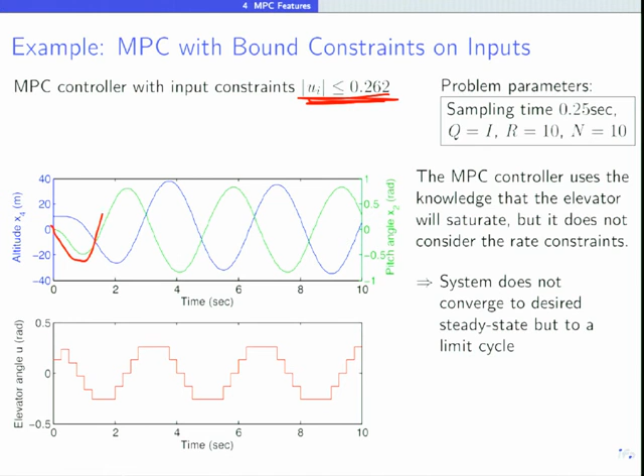So what is showing next is actually a good thing of MPC: how easy it is to have constraints. Another simulation where it starts from 100 meters, and now the input is too high, and the pitch, okay, it seems around 50 degrees, seems to be too high. So what happens here is, okay, can I limit the pitch angle? With LQR, again, this would be very difficult to do. It's impossible, not at least at the design stage. With MPC, you just put another constraint.

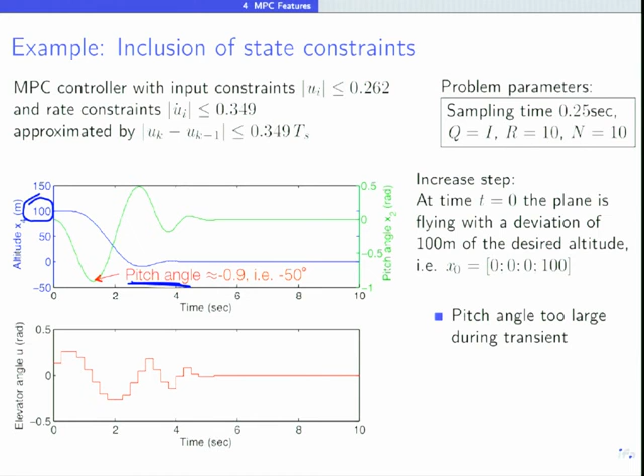Here is your constraint satisfied.

Again, this is a very illustrative example. First goal: remember the LQR formulation and MPC formulation. The message is that you can put all constraints and still get stability. Second message: you can put more constraints on the states, and they are satisfied, which would be very impossible to do with standard design techniques.

Third message, which is coming next: this was my tuning, the same LQR tuning with n equal 10. Let's try to reduce n. Why do I want to reduce n? Because it's fast. N equal 10 means how many optimization variables? Let's do the calculation.

I have two controls, what was it? This was one control input, 10 inputs over the horizon. I had 4 states, 40 states over the horizon. I want to make that shorter.

I'll use n equal 4, and here's what happens. With n equal 4, you get instability or a limit cycle again. So this issue, trying to understand the link between tuning and stability, is actually critical, very important.

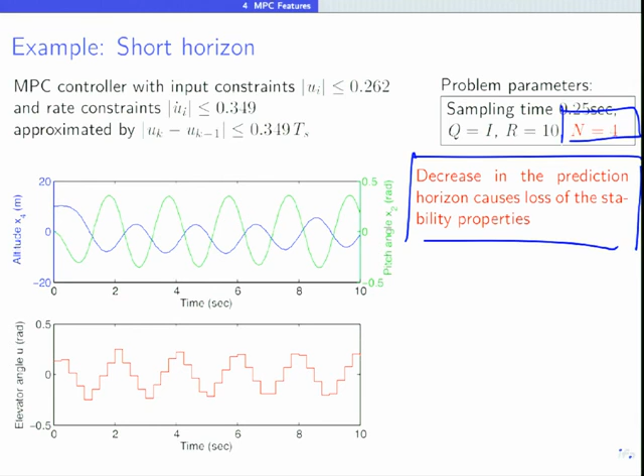So the next slides and discussion are about stability and invariance of MPC. Does it work? MPC is a short-sighted strategy, so you have no feasibility guarantee and no stability guarantee. Feasibility means that at some point the problem might not have a solution. Stability means that even if it has a solution, you will not converge to the origin, asymptotic stability.

Questions regarding this? Why is this happening? Let's look at a very simple example. Okay, 2 states, 1 input U. It's a double integrator, and I have input constraints.

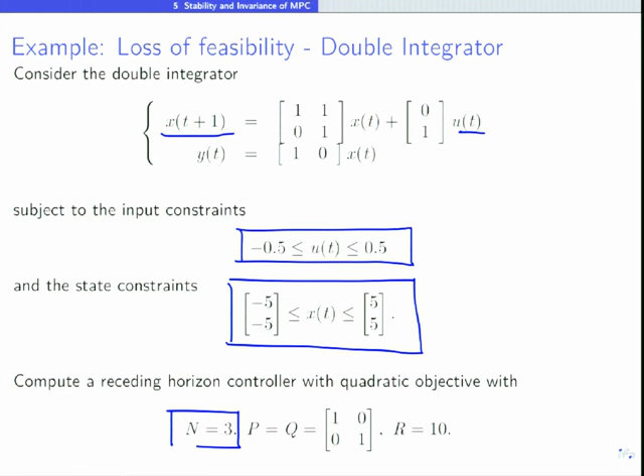The input can only be between -0.5 and 0.5, and I have state constraints: I want to be between -5 and 5 for both components of the state. The horizon is 3, P and Q are identity, R equals 10. Use this example, and these big matrices are given to you.

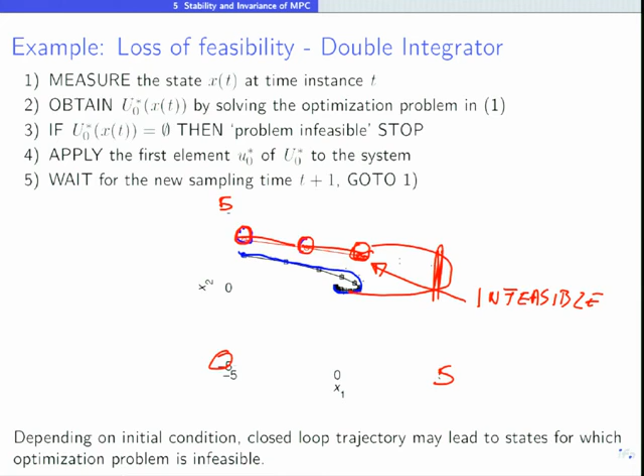So what I've done here, this simple plot tells you the circles are the initial states from which the problem is infeasible or will become infeasible. And the squares are all the initial states from which the problem will be always feasible. So this, let me try to color this set here.

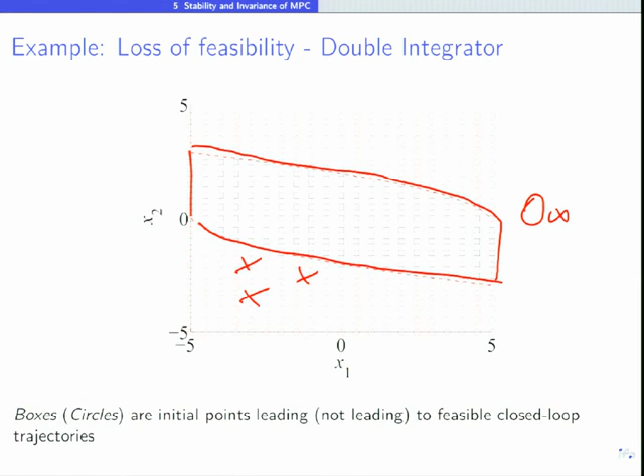It's actually a very important set. That's what you would like always to have. This is the set of all states for which if you start in there, you will be feasible at step 0, 1, 2, 3 until infinity. This is called a maximum invariant set, called O infinity. We will not spend much time, but there are more slides about the description of this set next. What you want to avoid are points outside, because from this point you start feasible and you end up infeasible later in the future. So the other challenge, we talked about, this closes the feasibility aspects.

The other challenge, can I play with tuning and somehow solve this issue? The answer from this example is that it's very complicated. So it's very difficult to play with tuning and get an always feasible controller. Stable, is it? No, actually it's not stable. This is an unstable system, 2 states, 1 input. 2 states, you will always see examples in 2 states because they're easy to plot.

Input constraints, state constraints, both components between -10 and 10. Here's what happens. In these examples, what we are doing is decreasing R and increasing N. So R, the first, we have R is your tuning knob on the input. Decreasing R means that you are detuning the control. You're using more input. And N, you're making the horizon longer. So let's see what happens here.

So first step, lots of R, short-sighted. All the points are basically will become infeasible. There is no point that will converge to the origin, which is this here. So notice the green area.

Let me use this color green. This is your calligraphic X0. This is the set of points, initial state of which the problem was feasible at time 0. So you start from a point inside the green area, you find a solution at time 0. At time 1, depending on the point, you might not find it. At time 2, all the points will become infeasible at some later time. So remember that your calligraphic X, so your original state constraints, making sure that you have a good

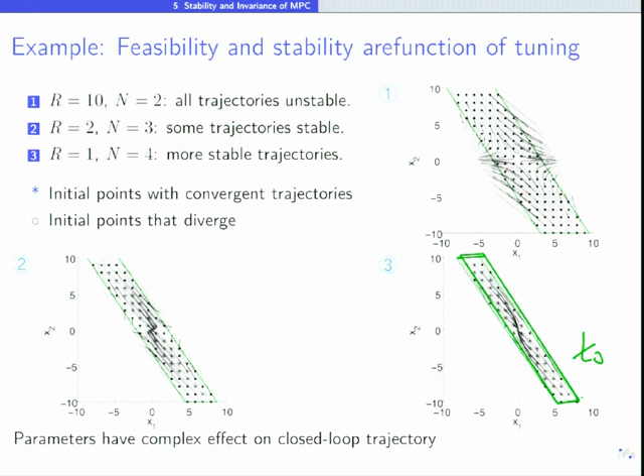Final message of this slide, just I don't want to make it too long. It's complicated. If you start playing with Q, R, N, you go nowhere. But you need to remember to look at the plot to the right. You need to remember 3 sets.

There is the big one, minus 10, 10. I think we always sketch it with blue, which is the set where you would like to keep your state in, blue. Then there is the set where the problem is feasible at time 0, which is the one I'm going to, in this slide, let's use black.

In black, inside the black one, this is the set of initial conditions that make the problem feasible at time 0. What did we call this? There's only one thing you have to remember: calligraphic x0, right? And then inside this set, there are the points from which, if you start feasible, you will always be feasible. This is the green one. We call that O infinity.

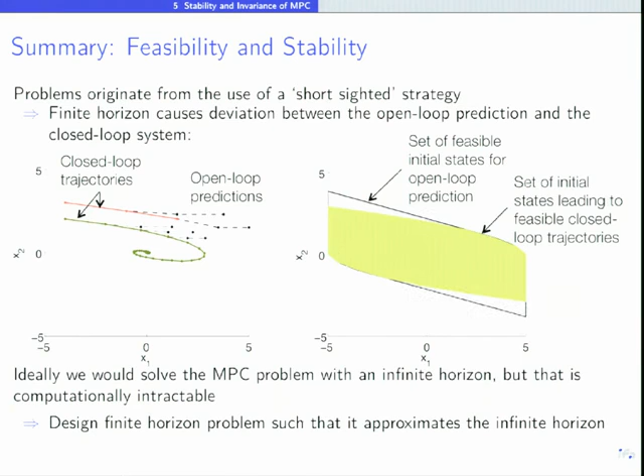So the rest of the slide shows how to do that. What time is it? Do we have some time? Yes, some time. Okay, 3 minutes? There are the 30 slides.

Okay, so let's summarize, then we'll see, we'll continue on Tuesday. Summary: finite horizon is what you like to get, with constraints, hopeless. Excuse me, the infinite horizon. Receding horizon control is the thing that you can do. Okay, but 2 issues: feasibility, you might become infeasible; stability, even if you are feasible, you wander around and you don't converge.

Okay, how we are going to address this? Here is the trick: terminal cost, terminal constraints. I'll show you that by playing just with these 2 things, terminal cost and terminal constraints, you can guarantee feasibility and stability. You don't have to play with horizon, Q, R, terminal costs and terminal constraints. Okay?

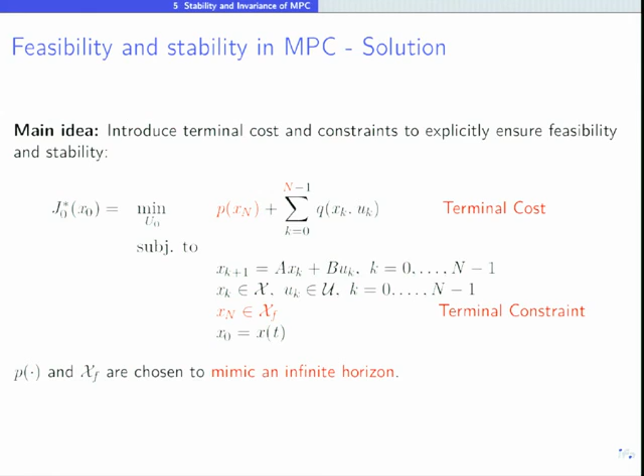And the idea is that, well, what is the idea? It's that because the infinite horizon has all of these nice properties, if I can find a terminal cost and terminal constraint that mimic the infinite horizon, then I will also inherit the nice properties. And quickly, I restart from here on, I believe, on Tuesday.

But so if you want to play with MPC and have it stable, the first thing that you do, very simple trick: terminal constraint equal to 0. Xn equals, so your xf, the set at the end is the origin.

If you set this, if you use this, then it is going to be always feasible and, for all feasible initial states, stable. And be careful, everybody say oh this is trivial - it's not trivial. You have to remember you're solving in a finite, in a moving horizon. So your 0 moves: 0 to n, 0 is here, 1, now that 0 is n plus 1, 2 is here, right? So your terminal constraint moves.

Despite this fact, this will guarantee stability, okay, and persistent feasibility. This was a proof from Gilbert, it goes back to 40 years ago from Michigan, and basically everybody else then has followed this proof and extended it.

The second thing that you will learn, this is not desirable. Why is it not desirable? Or what is wrong with this terminal set equal to 0? Yes? Yeah, because you need a long horizon.

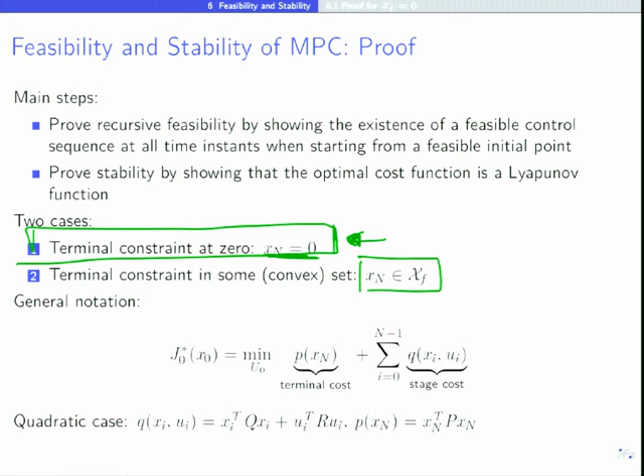Okay, so on Tuesday we'll continue from feasibility and stability of MPC, the proof, and we'll be done with, this will conclude the main part of MPC. And then it will be extra material on Wednesday, maybe, no, on Friday maybe.